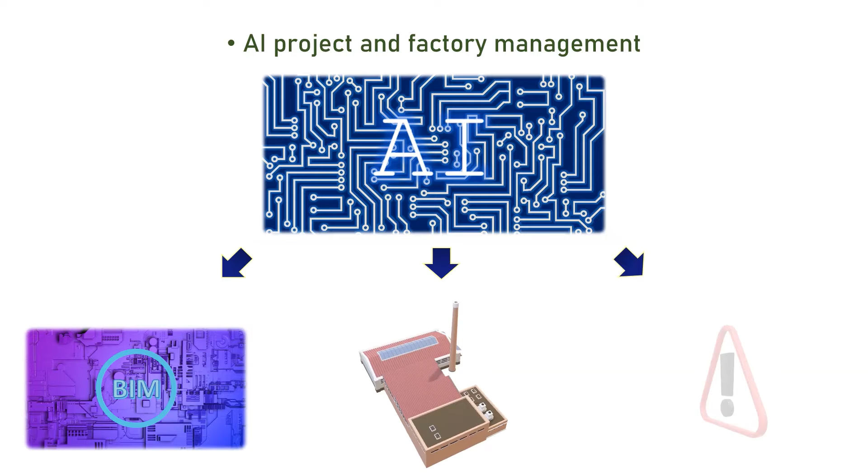The core of our idea is AI management of the construction process from start to finish. In a 2050 setting, it acts as the backbone of all construction systems as a human enabler in every step of the construction process. This includes assisting in project designs done with building information modeling, assigning tasks to factories meant to create building modules, and self-assessing the status of manufacturing and project development processes.

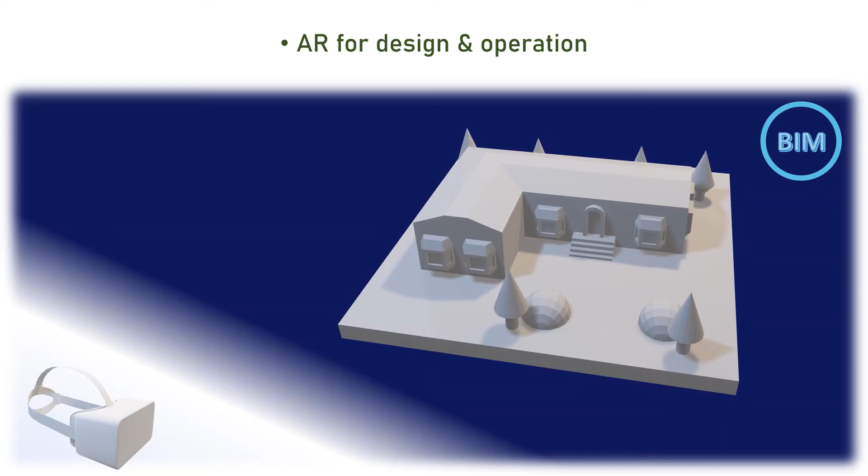AR will hold important roles in project design, machine operation, material transport, and module assembly. Human design work will be largely done in AR, where the building information model can be accessed. This work done in designing buildings will be managed by the AI system, which can also perform design corrections and extensive solution analysis.

Operation of certain machines may also be done through augmented reality, paired with extensions of the worker's body. These extensions could be implemented as physical enhancement for the workers or as a remote control from either inside or outside of the factory. This allows for much higher productivity per person and alleviates many workplace health and safety challenges.

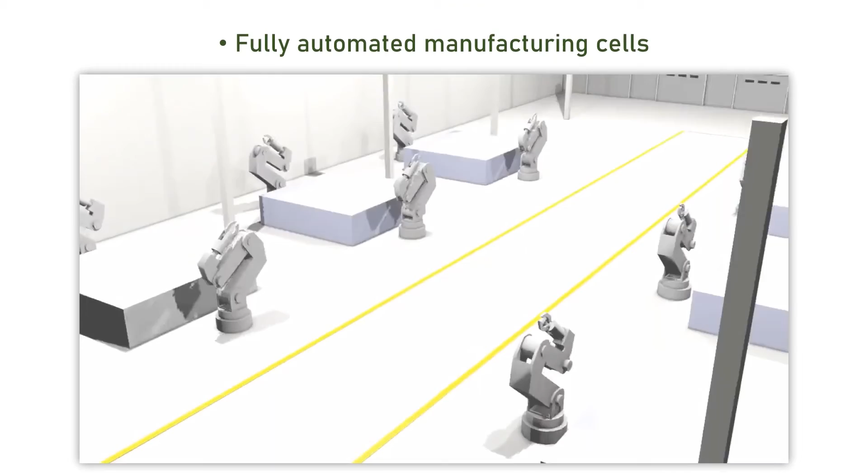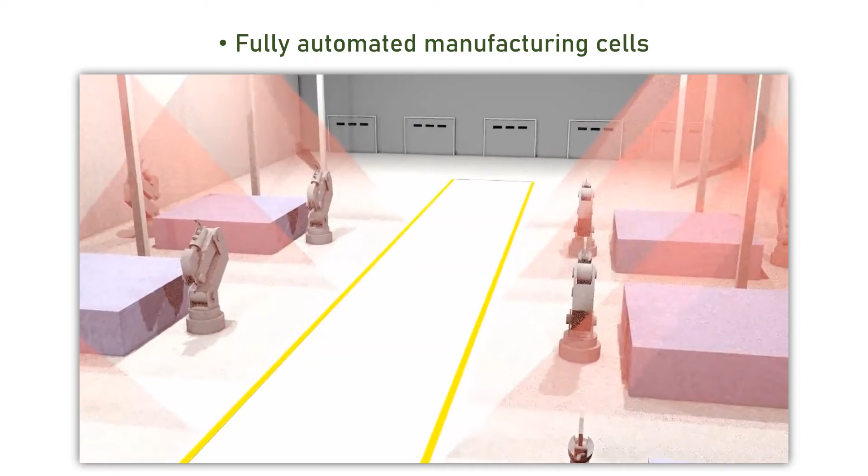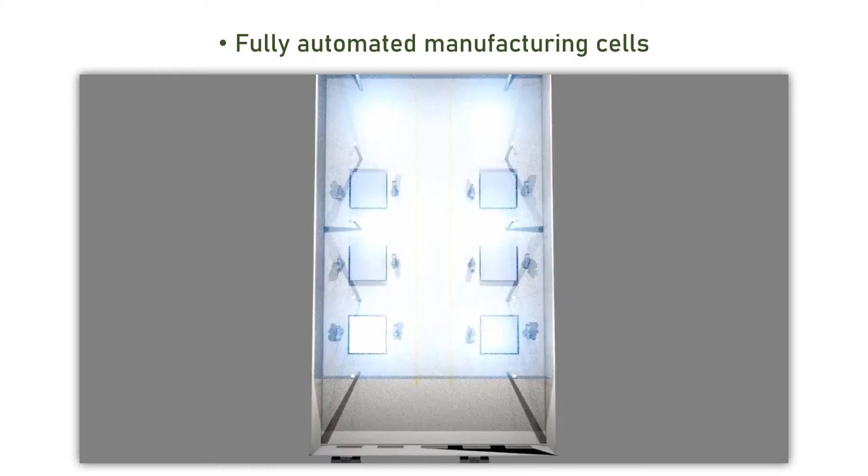With the construction of building segments, each part of the factory will be fully automated and AI managed. Factories will be broken up into manufacturing cells, meant for the modular construction of standardized building segments. Each factory space will simplify the process of material transport since all materials can be brought to centralized unloading ports, assembled in the appropriate manufacturing cell, and transported from these factories as fully fledged building modules.

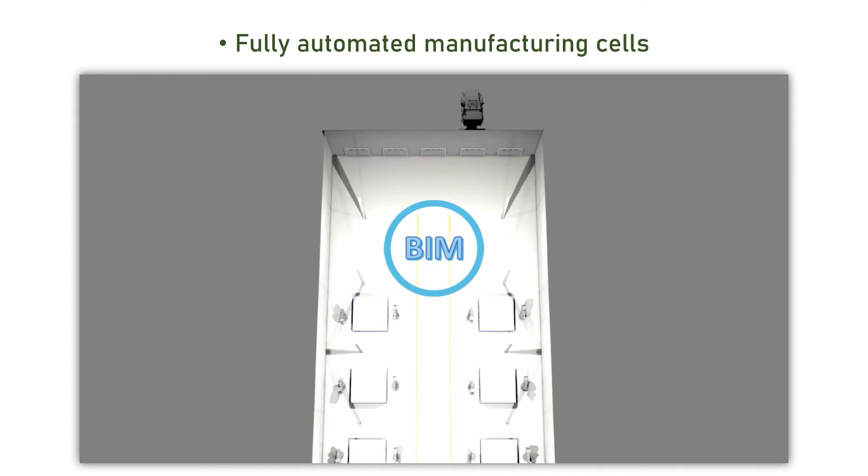Standardized building segments assembled in these manufacturing cells will more easily follow the building information model compared with traditional construction methods and stay up to code.

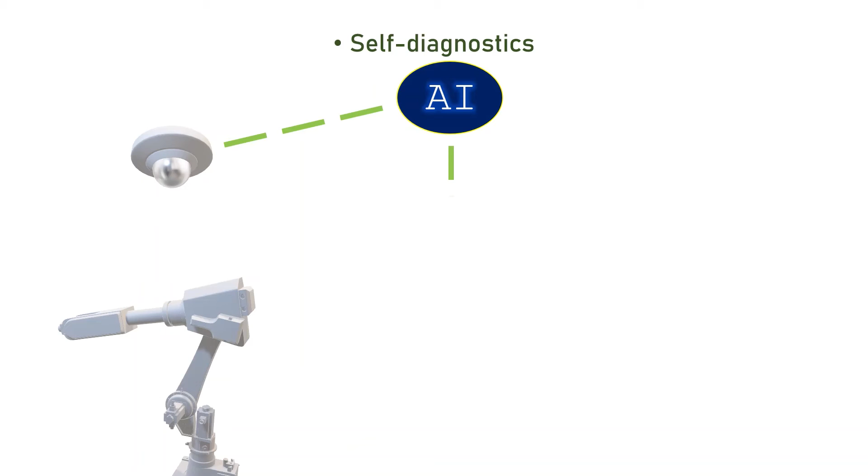Machines in both the factory and the field will be capable of self-diagnostics, where the AI system can detect or determine the cause of technical issues and correct them. The AI system can also micromanage each step in manufacturing and construction processes. Corrections to design, manufacturing, or on-site processes can be done either automatically or with remote workers depending on the scale of adoption.

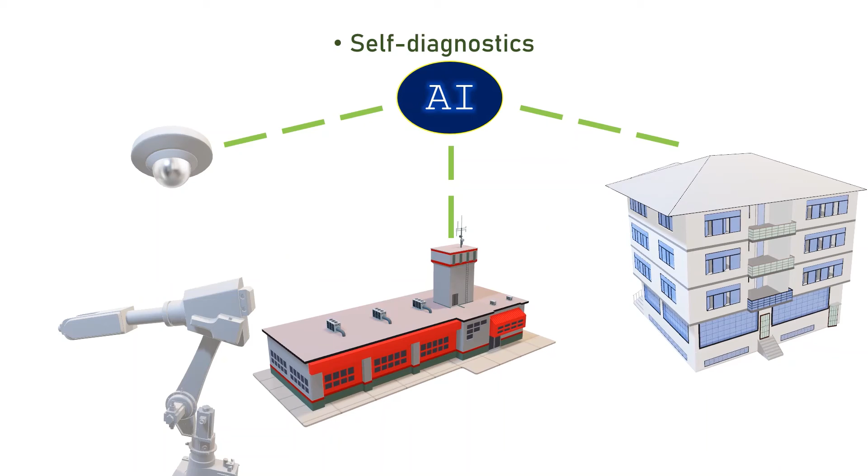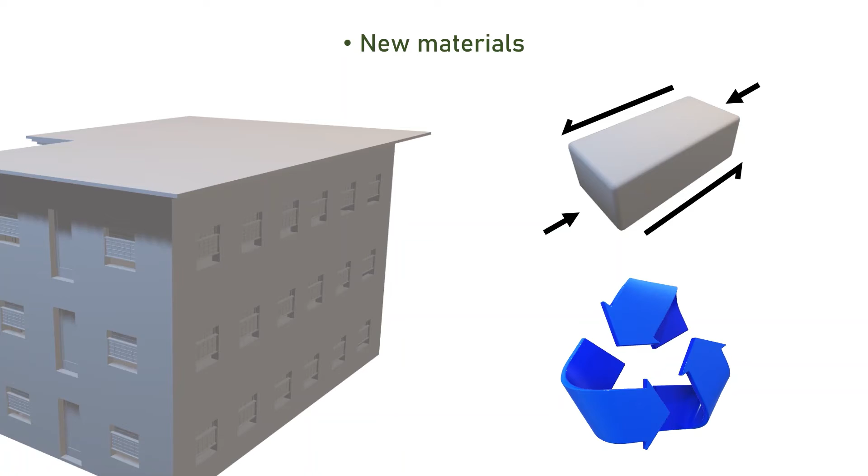By 2050, there will need to be several changes to the building materials that we use to construct things, whether they be for structural enhancement, the use of recycled materials, or the ability for building materials to be recycled. This can result from advancement in materials research or the continued investment and practice of sustainable construction. These materials should also be capable of being put together off-site for modular construction.

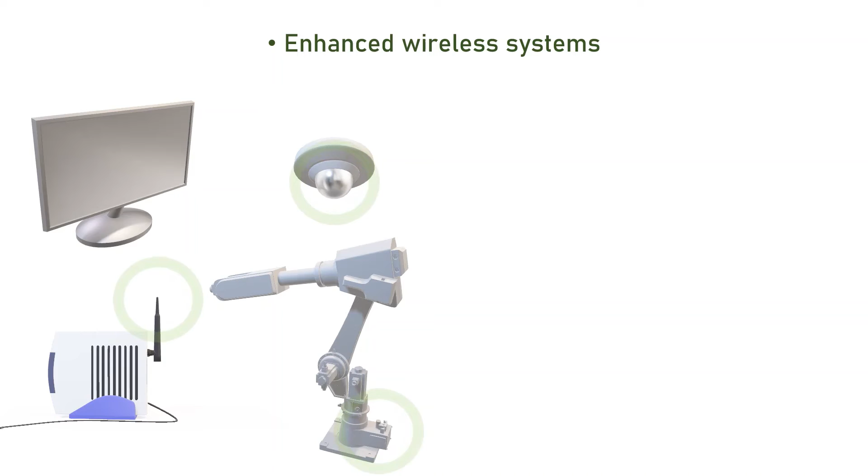As many of the AI systems will share information with each other and be highly interconnected, it will use future generations of wireless systems, such as Internet of Things, greater than 5G communications, and cloud computing. With an extremely high volume of data transmission and storage, it allows for seamless real-time communication and detailed analysis of all processes in manufacturing and construction.

So, what are the barriers for adopting this overarching AI-based solution and its constituent ideas? Why would this take time to adopt? Firstly, and most importantly, the fixed costs of the hardware and technology required, even for hardware that currently exists to realize some of these ideas, are steep. Continuous investments need to be upheld in the long term for the non-instantaneous adoption of these ideas.

Secondly, the specificity of components hampers the adoption of automated machinery, as manual labor is currently required to complete a wide set of building component permutations. Transitioning to a modular setup as the new standard for construction will be challenging from a design perspective.

Thirdly, the supply chain would need to be reworked to adopt a nodal, factory-centered model rather than having materials delivered to each site. An AI-based supply chain management solution can help with this, but issues with new material destinations and prefabricated components would need to be worked out between the right parties.

Fourthly, lack of agreement among stakeholders and institutions may slow the adoptions required to make modular construction solutions a reality, especially when it comes to job and resource allocation.

Finally, integrating these components into existing manufacturing and construction frameworks is a time-consuming and management-intensive process. New skills and training would be required for all workers involved in the construction industry, and the willingness to adopt these solutions would need to be widespread and convincing.